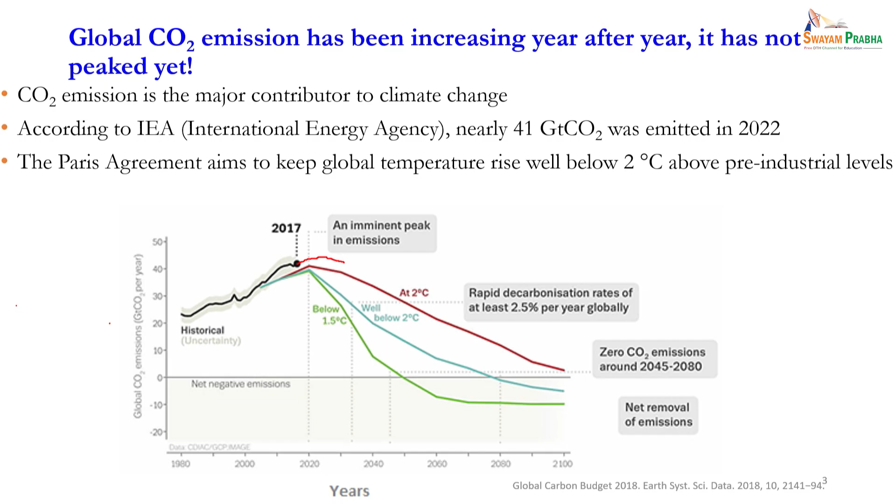If you look into this, if you have to go below 2 degrees or below 1.5 degrees, or if you are supposed to be at 2 degrees, these are the significant CO2 emission cuts needed. We will talk about it later, but let's go back to this slide again.

So what we see here is that in the 5 or 6 year duration we have to emit another 250 billion tons of CO2 into the atmosphere, which basically means this is the bus we have already missed. We will not be able to keep the global temperature below 1.5 degrees of the pre-industrial time. So if the pre-industrial average temperature was say 25 degrees, it is assumed that it will become an average of 26.5 degrees in another 4, 5, 6 years.

So if we had really wanted to keep it below 1.5 degrees, most of the technologies which we have already developed must have been implemented right now. It is not working at this pace. So this is gone. Let us now look into the 2 degrees scenario.

For the 2 degrees scenario, that is, to avoid a 2 degree rise compared to pre-industrial temperature, the carbon dioxide budget which we have is roughly 1150 billion tons. Now, this does not mean that this is an exact number. It tells you that if you emit more than 1150 billion tons of CO2 into the atmosphere, there is a 50% chance that global warming will be beyond 2 degrees of what it was in pre-industrial time. So let us assume a 50% chance is what we are now talking about.

Here also we gave that same number. So, 1150 billion tons of CO2 is what you can maximum emit. And this basically brings to this point, very important point, this is your lifetime target. It's not a target for 2050 or 2070 or 2100.

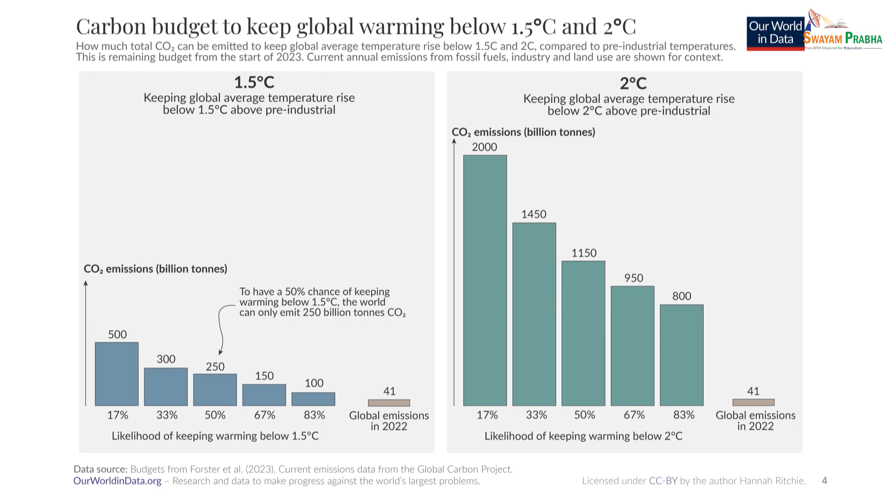You will have to break down all those sectors from where there is a CO2 emission. Okay, power sector is the biggest culprit. Most of our electricity comes from burning fossil fuel, either coal or other forms of fossil fuel, oil, gas, whatever you talk about. So if you are burning coal, this is the worst, because coal is mostly made up of carbon.

So you are burning coal to produce electricity, that's the product, but there is another product in this process, that is the carbon dioxide. Okay, C plus O2 will give us CO2. CO2 is a product. Energy is actually a byproduct which we use. Actual product is CO2. Now what is the challenge? We are saying that we will run a process where we will capture the product and put it back. Now this is a big challenge, big task. So far in human history we have not done anything like that.

People typically compare such things with pollution control and all those things. Pollutants are typically byproducts. They are at ppm level. SOx, NOx, carbon monoxide, particulate matter, all of these which we have somehow handled either from the tailpipe of vehicles or from point sources, we have only handled the byproducts which are not even 1%.

Today what we are talking about, we are saying that we will capture the product itself, and it's not pure when it is available to you. It comes as a 10% mixture with the remaining 80 to 90% of nitrogen. This makes it even more difficult. So this is the challenge, and this is why it's a very tricky situation, what you will do so that you will become net zero.

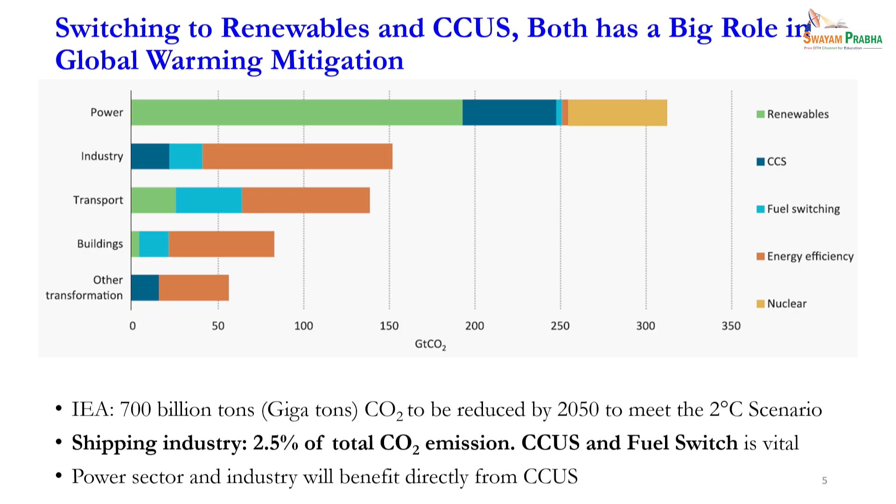Let's move on. The take home message of these two slides is: 1.5 degrees is gone. 2 degrees is what we are targeting now. If you have to target 2 degrees, the two options we see in this slide are, one, move from fossil fuel based energy sources to green energy sources. That is going to reduce your CO2 footprint. And whatever CO2 you are producing because of materials, electricity and all those things, you will have to capture that CO2, utilize it or sequester it.

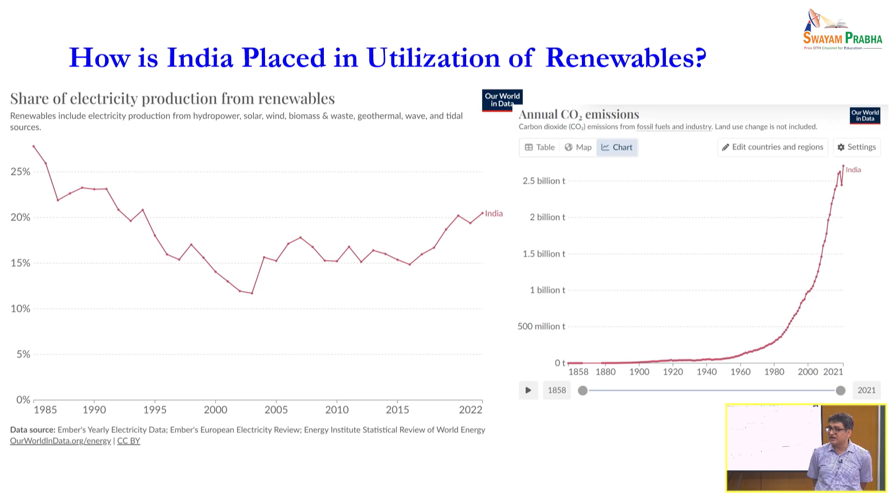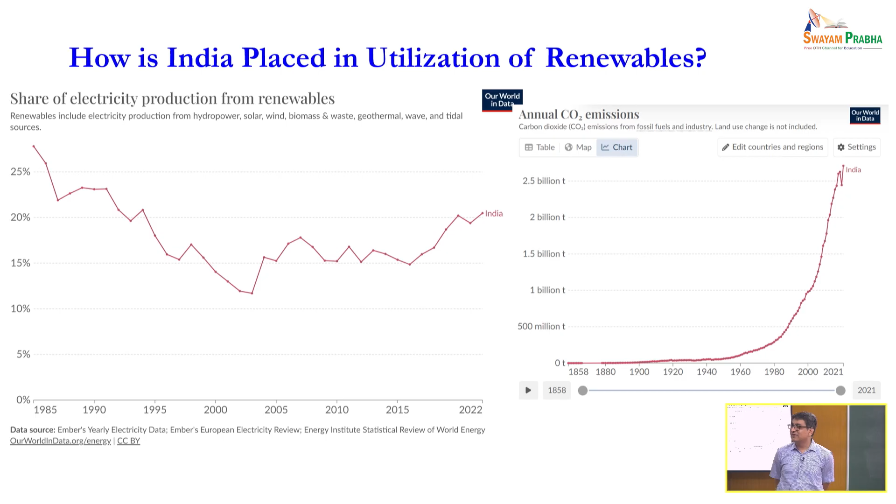Other countries will say, even today, in Azerbaijan, at this last COP, they started saying, no, China and India, we should not consider them as developing countries, we should consider them as developed countries. As soon as they count you as a developed country, you will have 100% onus on reducing your CO2 emission. Right now, there are a lot of funds which you can utilize from the World Bank and other sources. So those challenges are there, let us not talk about that.

Moving on. So this is the story of green energy. I do not want to talk too much, but there are other challenges here, whether these are net zero processes or not, and if it is really a net zero process, for how long is what we also have to understand. So this is the installation of solar. We are increasing nicely, we have not reached our target, but that is not a problem. The problem starts later. When we talk about solar energy, it has a plant load factor of roughly 20%. What exactly is plant load factor? Those people who are in industry would understand it better than the students.

Plant load factor means that if I have installed capacity of 100 megawatt, how much I am actually producing from it. For example, in solar energy, sunshine is only 6 hours a day maximum on average. We have to average over the entire year. Summer time will have more sunshine; monsoon time, like in Chennai, from the last 2-3 days we have not seen sun. Winter time in northern India will see no sun for many days. So on average you have sunshine for 6 hours a day.

It basically means you will have to install 5 times what you actually need. It basically means that the plant load factor is 20%. If I install 5 times, only then will I have enough during the 6 hours of sunshine to utilize that electricity for the remaining 18 hours when I do not see sunshine. So this is why the plant load factor of solar energy is very poor.

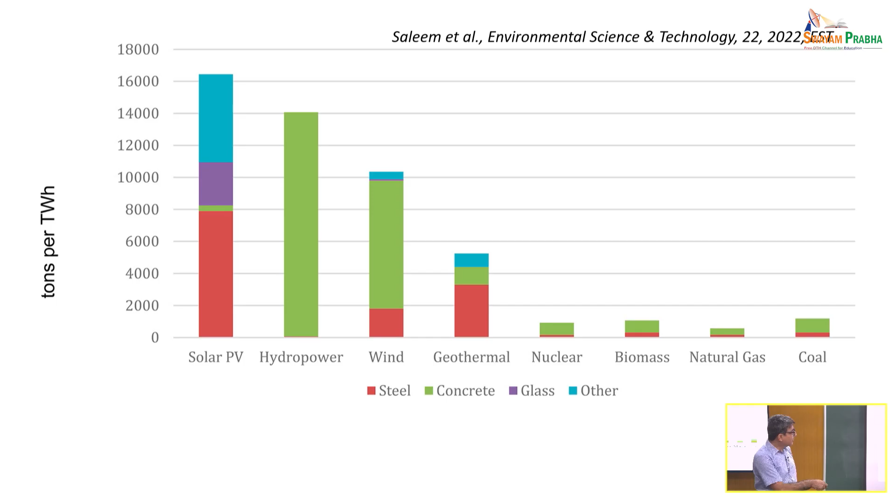So the point I am trying to make, if you start looking into how much CO2 you have already emitted. These processes will emit CO2 while you are producing the electricity. This process will emit CO2 while you have put the plant itself. So there is CO2 emission in the capital expenditure of this process, and this is during the operation of this particular process. Now let's look a little deeper.

Typically, when you are producing 1 kilogram of a material in a single step or dual step process, you would roughly produce 3 kilograms of CO2 if you are using fossil fuel. For example, on average, 1 kg of steel will produce roughly 2.5 kilograms of CO2. Similarly, any other material will have a CO2 footprint. If I am going to produce 16,000 tons of this material to produce 1 terawatt hour of electricity, I am already producing 48-50,000 tons of CO2.

Now you have to understand that we are doing 5 times the required installation, because even though I need only X kilowatt hours of electricity, I will have to install 5 times that because only a 20% plant load factor is there. So that 50,000 of CO2 footprint, 5 times that becomes 250,000 of CO2 footprint. So while these processes do not produce any CO2 while producing the electricity, they have a CO2 footprint which has to be divided over the lifespan of the solar panel.

Now if the lifespan of a solar panel is 20-25 years, a very good thing, because typically the numbers say that in roughly 5 years you should get payback for the CO2 produced during the installation phase. So if I am going to produce electricity for 20 years from a solar panel, that makes sense. The first 5 years will balance out the CO2 footprint, but the remaining 15 years we will gain. But then look at the other point I was trying to discuss. In 2018 people predicted that by 2020 we will peak.

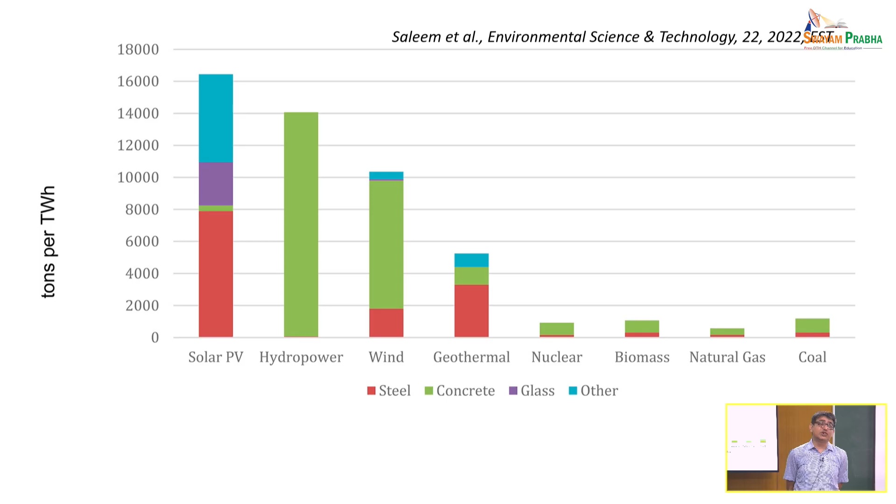Why have they not peaked? Because we are continuously installing new solar panels, new wind energy, all kinds of things, even though we have sufficient capacity from fossil fuel. Now when these new installations are coming, as per this discussion, these new installations are actually adding CO2 into the atmosphere, not reducing it. So if these installations are not running for 5-10 years, it is not going to bring it down.

So this is why you are not able to predict this peak, because you are not taking into account that the new installation which has to happen has already emitted the CO2 for the next 10 years. Otherwise, over these 10 years, the fossil fuel base would have slowly emitted those numbers. This you have already emitted at once. So the more green you do right now, the more CO2 will come into the atmosphere for the short period of time. The challenge will start with technology advancement.

5 years down the line, a faculty will tell you, no, I have a solar panel which is 25% efficient. Today you are running a solar panel which is only 15% efficient. Change your solar panel. So 5 years down the line, you will be forced to change your solar panels. When you are changing your solar panels, what will happen to the CO2 footprint? Will we become net zero? We will not. This is the challenge.

And this is bound to happen, because in 5, 6, 7, 10 years' time, you will see that the efficiency of the solar panel, even the technologies, will be changing. You will need new, more efficient technology. So you will again have to do the same thing. So we cannot jump there and say we will become net zero by so much time. It is a step change. It takes time to do all this. It does not happen automatically.

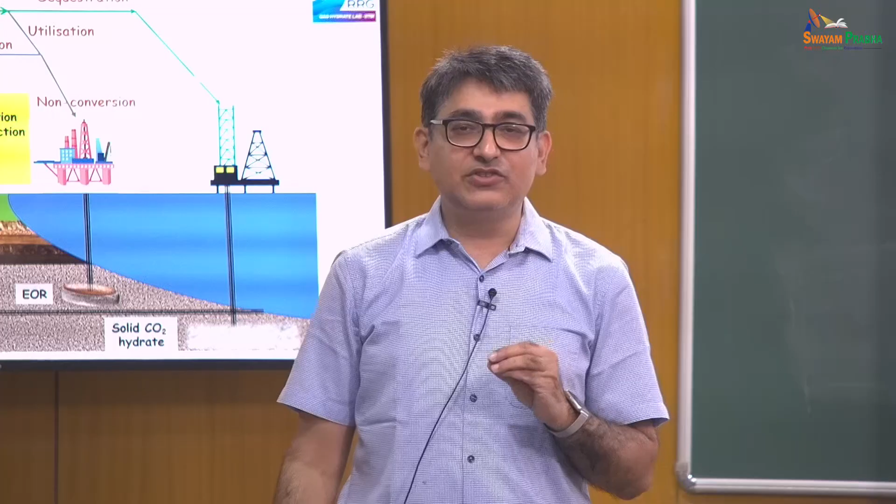So this was the story of green energy. The take-home message is, don't assume that green energy is 100% net zero today. It's not. I gave an example of solar panels, but if you talk about turbines, for the blades, you don't know how much material has gone into those blades, and they are not simple blades. They are designed materials, which basically means these materials have gone through 5 different steps. Carbon fiber goes into it.

Where do you get the carbon fiber? Does it grow on trees? No. This carbon fiber has gone through multiple steps, high temperature processes, and has emitted a huge amount of CO2 which we are not counting today. So each of these materials are the solutions which will make us net zero. I am not saying they are not going to make us net zero. They will, but it will take some time. Right now you are emitting all the CO2. So this is why this peak prediction is very difficult for us to do.

So that green energy thing is done. Let's now look at CCUS, because this is another area and one focus of this particular class.

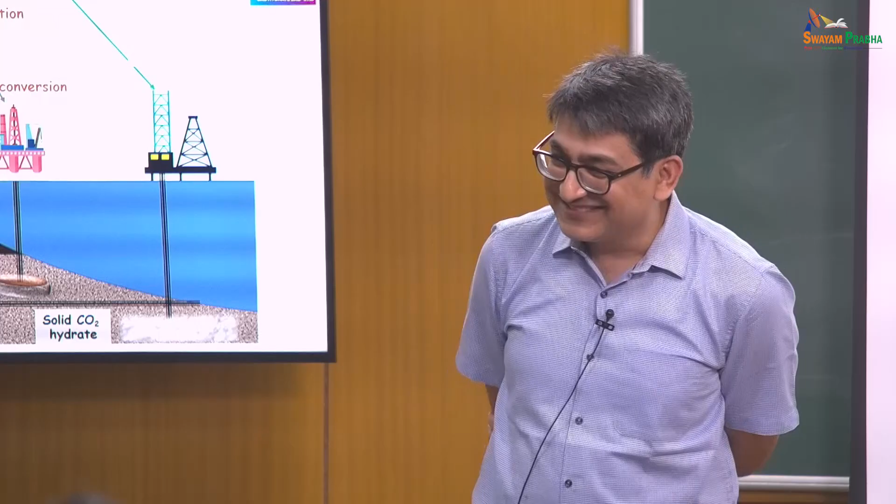How much time do I have? Okay, no, I have enough time, don't worry.

I will talk about the problems first; solutions we will talk about slowly. Solutions are difficult to come by, the problem is easier to explain. So carbon dioxide capture, utilization and sequestration, CCUS, is actually a 3-step process. First you have to capture the carbon dioxide. Most of you are chemical engineers; it's basically a separation process. We are separating carbon dioxide from other gases. What are these other gases?

The other gases which come out during the combustion of coal. Why do we have to worry about it? Because coal is a solid, and you have to burn the coal with a gas. The other reactant is a gas. So when I have to react a solid with a gas, there is a problem. As a chemical engineering problem, it is a bigger problem, because a solid has millions of molecules in this much space and a gas has few molecules in this much space.

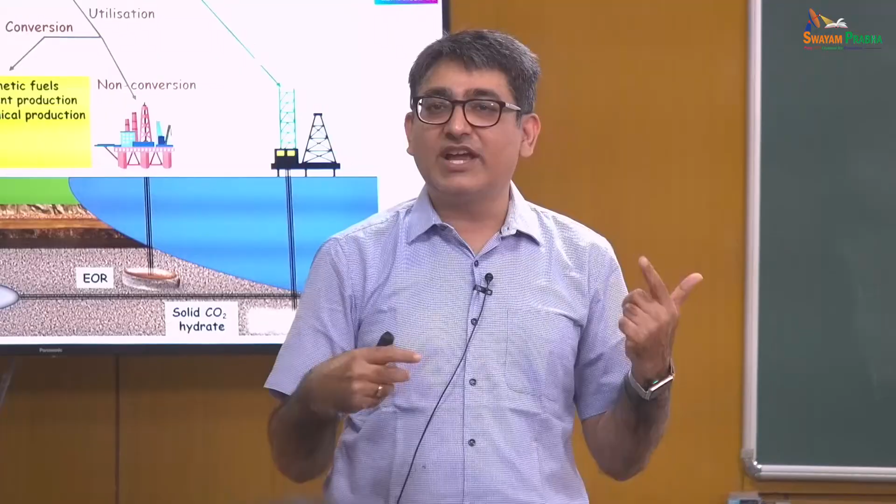And if these two have to react together, the reaction has to happen 1:1. So if I have to make this true, that is, the reaction has to happen 1:1, I have to compress the gas, okay, and I will have to pulverize the coal. Both I will have to do. So this is why the combustion typically happens with excess supply of air.

Okay, if it does not happen with excess supply of air, then instead of carbon dioxide you will produce carbon monoxide. You don't want that, because it will be a poisonous gas. CO2 at least is not a poisonous gas. It's loved by the plants.

So you might die, but plants will survive. The human civilization will evolve again, which has happened multiple times. So it should not be a problem.

You don't want carbon monoxide to come out from this process. So this is why it's typically done at a very high pressure or excess supply of air. Now why air? We could have done it with oxygen. No, it will produce only CO2 and a little bit of additional oxygen. Would have been better? Maybe it would have been better, but then when these power plants were designed some 40-50 years back, they said, oh, there is only 20% oxygen in the air.

If you have to separate oxygen from the air, it will be very expensive. Why do that? Let's burn it from the air itself. Okay. So 40 years back, we were worried about separating 20% oxygen from the air for combustion of coal. Today, we are ready to capture 400 ppm carbon dioxide from the atmosphere. So this is the story. What can you say? Okay. So this is the challenge. Air is what is now being used.

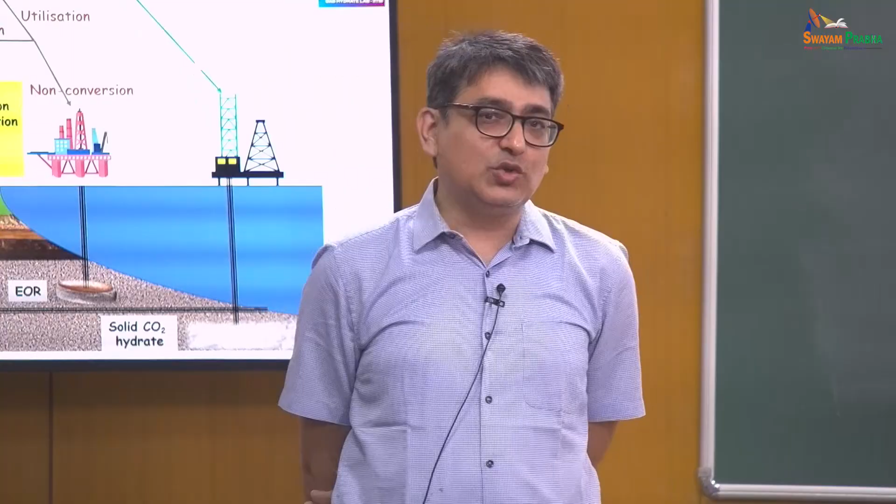So when you are using air, it has roughly 80% nitrogen, only 20% oxygen, and on top of that you will have to have excess of air. So 80% becomes 85%, 90%. So by the time the combustion happens, you will see that there is only 10% carbon dioxide, 12% carbon dioxide, and the remaining being nitrogen. So the CO2 capture process is basically a separation process, a classical chemical engineering process of separating two molecules. Minimum two molecules will be there. One is CO2 and one is nitrogen.

But in reality, you know, there are many molecules. CO2 is there, nitrogen is there, SOx is there, NOx is there, oxygen is there, all kind of crap is there which will actually kill you. But let's not worry about that. Right now, let's try to make it very simple. We have two molecules, carbon dioxide and nitrogen. Now the challenge is, there is a proverb, no? If there is a rotten apple in a basket, every other apple gets rotten.

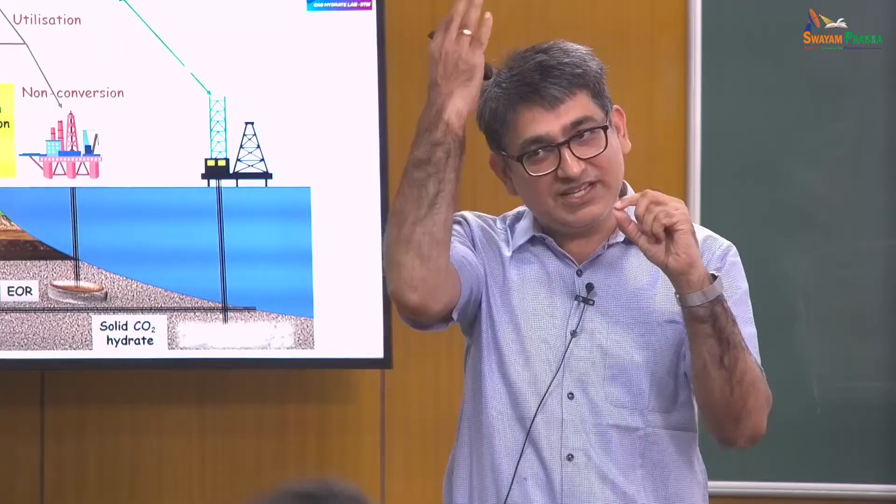So when there is one CO2 molecule in the vicinity of 9 nitrogen molecules, this CO2 molecule will start behaving like a nitrogen molecule. You know why? Because the nitrogen molecule at room temperature has very high thermal energy. It's a small molecule. If you give a little bit of energy to it, it will jump like anything. Okay? If you are very light, you can jump. If you are heavy, you will not be able to jump.

So it's a very small molecule. So at room temperature, it has a very high kinetic energy. And with that kinetic energy, it goes and bombards the CO2 molecule. So CO2 molecules also start jumping like nitrogen molecules. So now, what I was trying to do, I was trying to capture a CO2 molecule from this mixture. So if I have to capture someone and this guy is running, we need more people to capture it. This is the challenge.

So when we talk about capturing CO2 from a flue gas, a point source, there are roughly 9 nitrogen molecules to one CO2 molecule. Now if I have to capture one person among 9 other people, it's not that difficult. Okay, I should be able to employ 5 people and they will run and they will catch that particular guy. But now the second problem is, what if we have to capture one among 2500?

What is that problem? That is direct air capture. Okay, this is the elephant in the room. People say direct air capture is the future, because we have already produced all the carbon which we wanted to produce from under the ground. Now there is plenty of carbon above the ground. Why unnecessarily dig under the ground for carbon?

Let's capture all the carbon from above the ground. We will convert it into chemicals by adding hydrogen. This is what CO2 utilization is. This is what has been talked about. The US is pumping billions of dollars. They give $180 as subsidy if you are capturing 1 ton of carbon dioxide directly from air. Okay, but look at the thermodynamics.

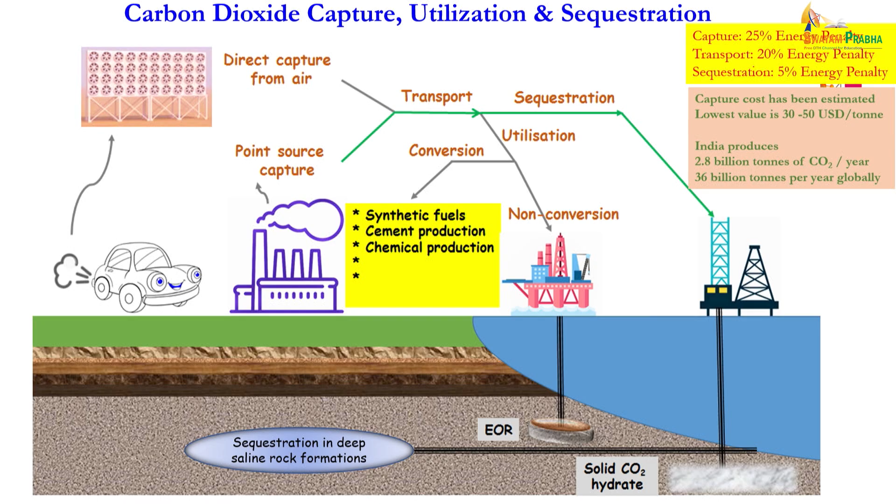The cost here, for example, the direct point source capture is roughly $30 to $50 per ton, or in terms of Indian rupees, roughly 4 to 5 rupees per kg. You have some representatives from Technip, they may claim that they have a 3.5 rupees process, but I will tell you it's roughly 3.5, 4, 4.5, not less than that per kg. It comes out to be roughly $30 to $50 per ton from point source, and I am not even talking about many other processes which we will see later.

If I am going to capture this from here, the subsidy given is $185. So you can imagine what the actual cost will be. Now if, in India, I have to capture 1 billion tons, multiply it by $50, how much money will get consumed?

But at the end of the day, I am trying to say that all this is possible if we are aware of what we have to achieve. We should be able to achieve it if we know what we have to design it for. The designing has to be done for net zero, nothing else. If we are not designing it for net zero, it will not become net zero. All this I have already discussed, I will quickly move on.

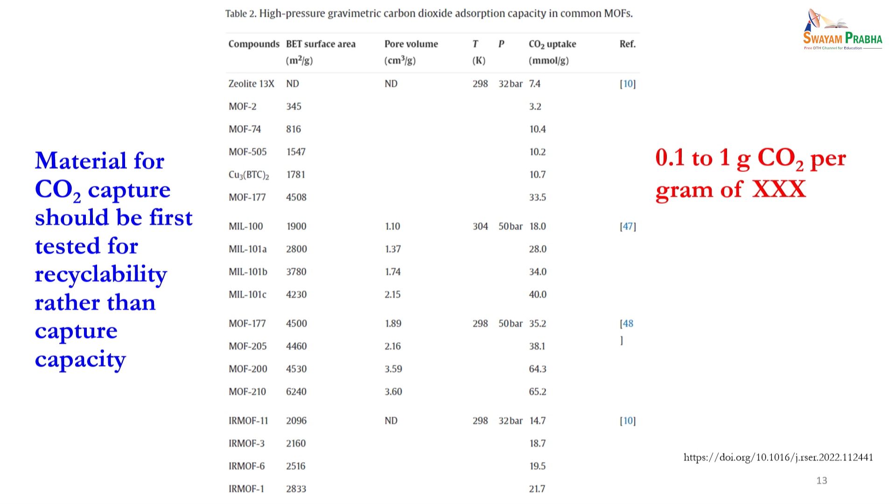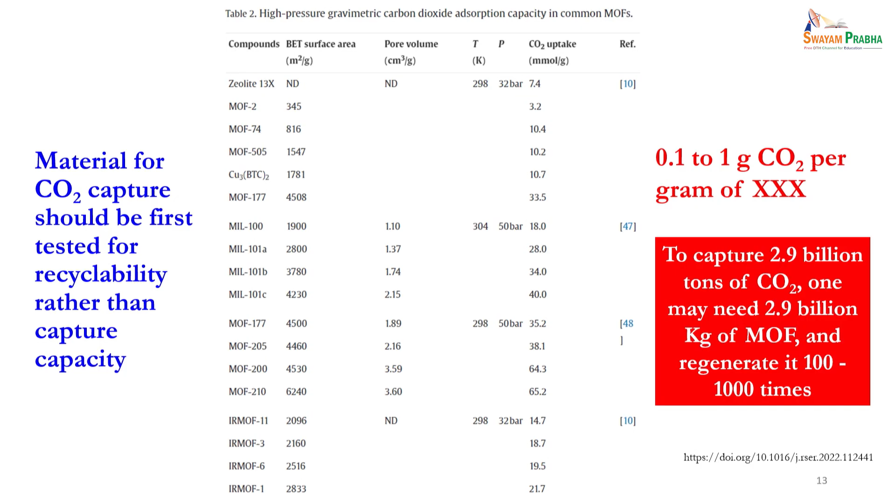This is the material. For example, you will have some zeolite, some metal organic framework. Typical number is 0.1 to 1 gram of CO2 per gram of sorbent. So if I have to capture 2.9 billion tons of CO2, I need 2.9 billion kilograms of MOF, regenerated 100 to 1000 times. You don't even know how to generate an MOF, for example, or any other exotic material. In labs, it takes 1 day, 2 days to produce 1 gram.

I am not talking about the time here. I am talking about if you are running it for 1 or 2 days using the same energy which comes from fossil fuel. Look at the CO2 footprint of this material. This material has not 3 kilograms of CO2 footprint, it has 10 kilograms of CO2 footprint. And this is the same story for all those carbon fiber reinforced wind turbines and all those things. These challenges are there.

Industry says that we have monoethanolamine, diethanolamine and all those things, and the solution Technip might tell you is an amine based solution. We also talk about it, we also do similar research. But let's look at the challenge over here. This is supposed to be the God molecule, which will capture all our CO2 and get rid of all our problems. But where does this molecule come from? Does it come from air? It does not. We will have to produce this molecule.

How will we produce this molecule? We have to produce it by reacting ammonia and ethylene oxide. The ammonia which currently produces monoethanolamine, is it green ammonia? Not green ammonia. It's grey ammonia, black ammonia, and you know the ammonia process is 300 bar, 300 degrees centigrade. Can it be done without CO2 emission?

So first this monoethanolamine has to capture the CO2 coming out from the ammonia processing, and then from the ethylene oxide processing, and then if it is still around, it will capture the CO2 from here. That means if it gets consumed in doing this, then this CO2 will remain as it is. So this is a challenge.

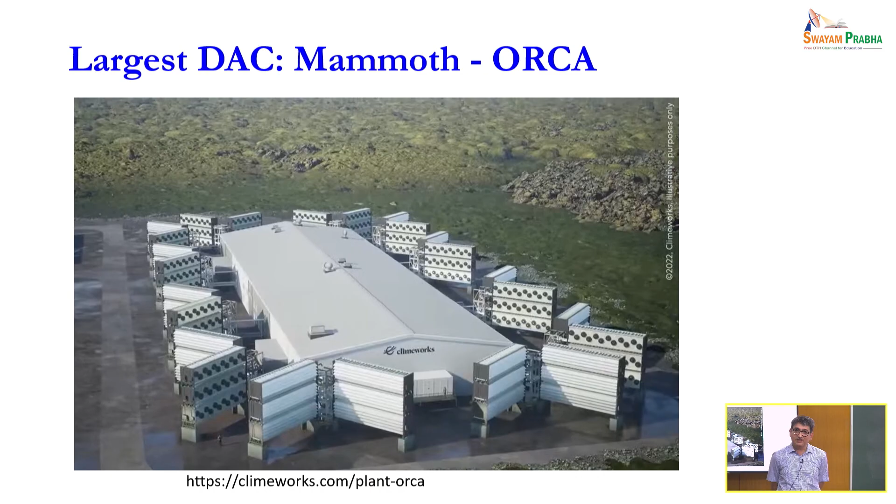This is the largest direct air capture plant, which is called Orca, in Iceland. Beautiful plant, excellent technology. Okay, how much does it capture? It captures 4,000 tons of CO2 every year. Tell me how many tons of cement and steel have gone into production of this plant. This plant has already emitted 10 years of the CO2 it can capture, maybe more.

Is it net zero? Maybe if it runs for 50 years. But do you think it will run for 50 years? The technologies which are being used, Gen 1, Gen 0 technology, what we will call it, do you think it will be running for 50 years? I doubt. Maybe we can change the material, the construction will be there, but if it's corrosive material, will it?

I'll tell you, oil and gas, many of you are from there, these amine based processes which are actually being utilized to capture CO2 from natural gas, hardly 5-6 years is the lifetime, they change it. They make a lot of money, so they change it, they don't bother. Here you don't make a lot of money, these are all money consumers, so you will not be able to. So these are the challenges.

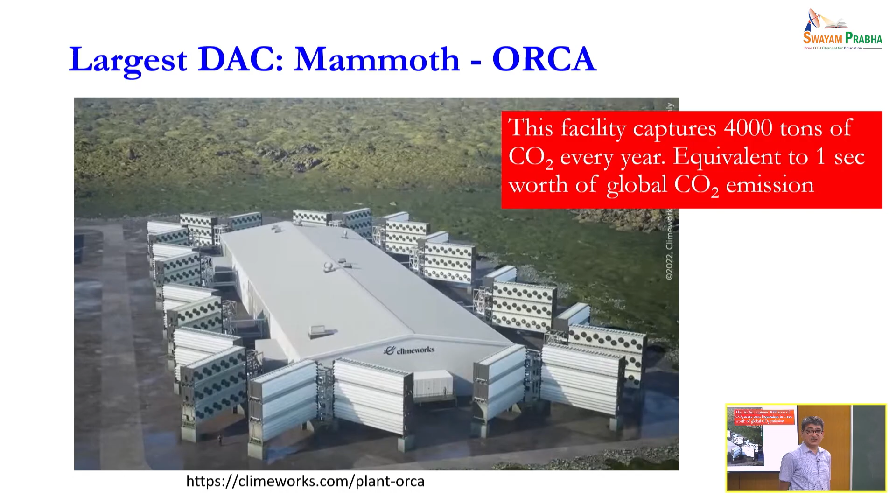Okay. Forget about the remaining slides. So we do all that in our group over here, so I don't want to do marketing in this particular class. Let's move on.

So when we talk about CO2 capture, we know now that we have to generate a material to capture CO2. What if we don't generate a material to capture CO2? Because if you are generating a material, if you want to generate 1 kg of MOF, you will produce 10 kilograms of CO2. Your net zero becomes not a possible solution. But if I don't generate a material, I take a material which already exists, then I don't emit those 10 molecules of CO2 for that 1 kilogram of material, or 1 molecule of material, which I have just used.

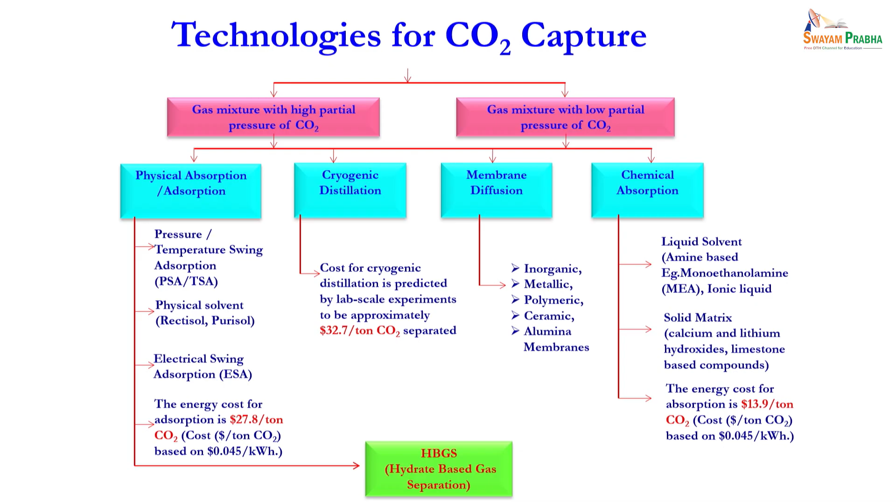So there are different solutions, different compositions of CO2, oxygen, nitrogen, hydrogen, H2O, CH4. I don't want to go into each of these. So depending upon the concentration of CO2, you have different solutions. One of the best ways of capturing CO2 is not going for a chemical route, but going for a physical route. What is a physical route and what is a chemical route? Chemical route basically means that the CO2 is going to chemically react with the material in which it has to be captured.

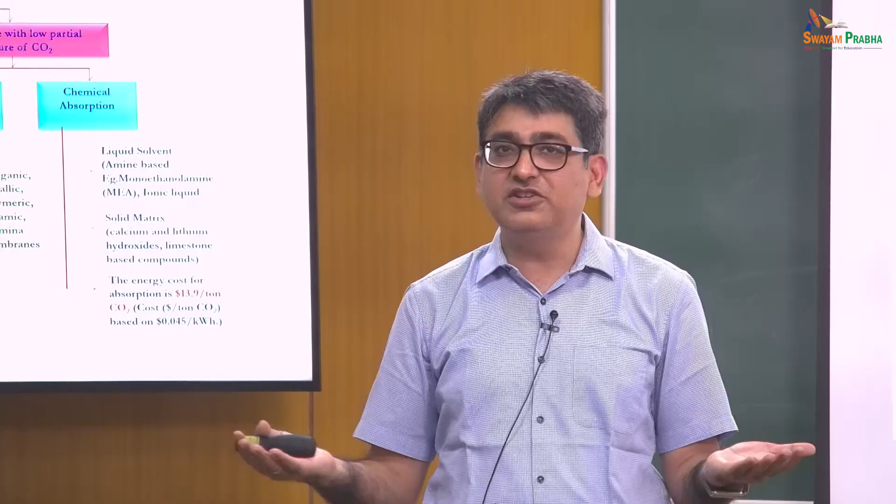So if I have a mixture of CO2 and nitrogen, I have two options. I expose this gas mixture to a material which chemically reacts with CO2. So this is called the chemical route. Why do we need this material? We need this material because the binding chemical energy is much stronger. So even if my concentration of CO2 is low in my feed gas, if I am using a chemical, it will be able to react really fast.

Why is fast important? Because we are talking about tons and tons of this material. You need kinetics which are really fast. Otherwise your CO2 molecule will run away, you will not be able to capture it. So you need a material which has very fast kinetics. And which material will have very fast kinetics? If it is thermodynamically very feasible at that temperature and pressure condition, a chemical reactant will be able to achieve this much more easily compared to a physical adsorbent, which separates by dissolving or adsorbing CO2 in a larger quantity compared to nitrogen.

So when we talk about a physical approach, it's not molecular recognition; it's there to a certain extent, but it's not 100% molecular recognition. When we talk about chemicals, it recognizes the molecule and captures it. It will not capture even a single nitrogen molecule, because that recognition ability in a chemical is much better compared to a physical material. A physical material will capture based on van der Waals interaction, and van der Waals interaction will be there in every molecule, whether it is a small molecule like nitrogen or a large molecule like CO2.

Both of them will have van der Waals interaction. CO2 will have higher van der Waals interaction, so it will be able to capture faster compared to nitrogen, which is slightly slower. So in this process, physical process is more about enrichment. It's not about complete separation. Typically if you are looking for 100% separation, you will have to go for chemical approach.

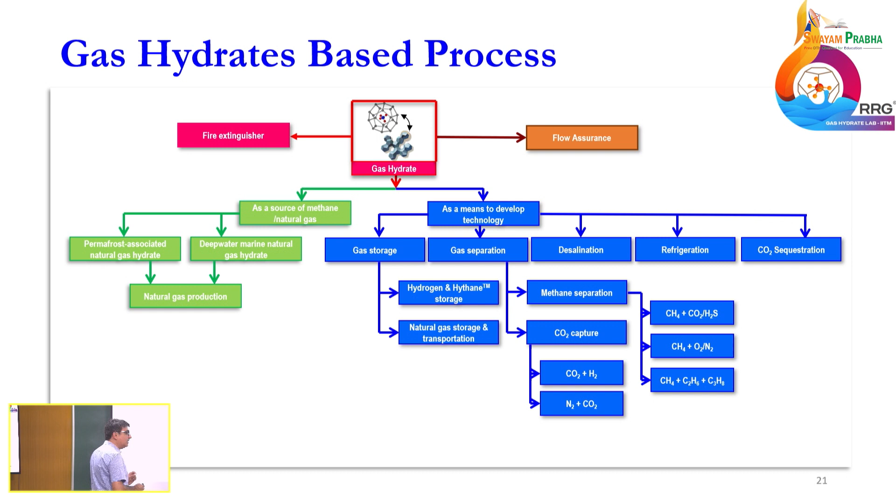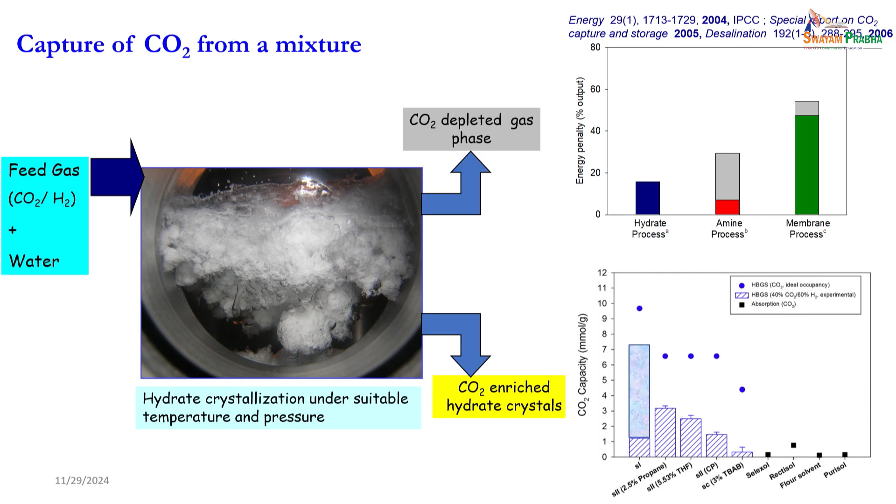Gas hydrate is one such process where you do not need to generate a new material. I am using water, not fresh water. I can use sewage water, effluent water, sea water, any water, it does not matter. I will be able to bring this water and this gas mixture together, and this would convert into this kind of hydrate. Once this converts into hydrate, I have achieved 2-3 things. Where the advantage comes from this process, I will tell you. 3 things I have achieved.

One, I have purified the water, because once hydrate forms, it will only form with the pure water molecules. So all the water molecules will come together and form these ice-like crystals. So if I separate out this crystal and dissociate it, I have got pure water. That's one thing I have done there.

The second thing I have done: when I have a huge amount of solar energy available for the 6-hour period, I can form a huge amount of hydrate during those 6 hours. What have I done? I have stored all that energy in the form of the enthalpy of hydrate formation. Because when I have no sunshine and I dissociate this hydrate, it's an endothermic process. So my temperature will keep going down, so I will be able to do my cooling and all the things which require 60% of the energy of a building.

So first, I separated pure water from contaminated water. Second, I have stored a huge amount of solar energy, which I would otherwise need batteries or something else to store, so I have stored it already in the form of hydrate. And the third is the separation of gas, which was our main goal.

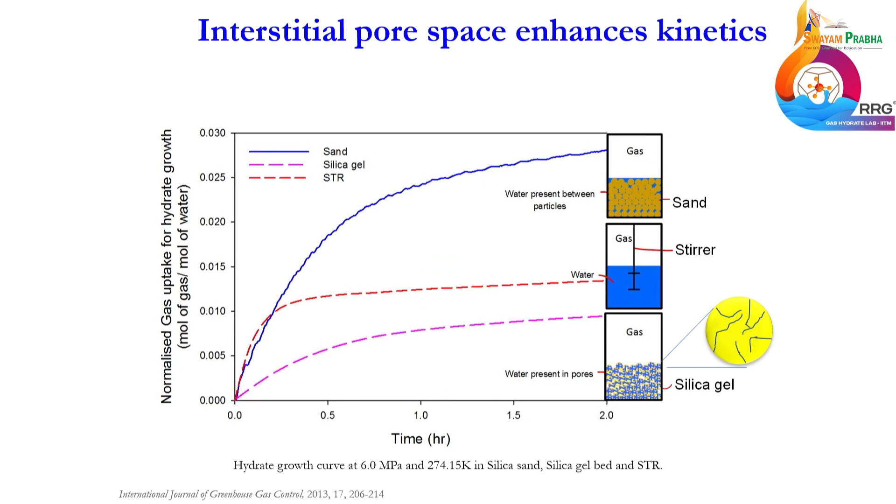Okay, so that's all from me today. We will not talk too much about all of these. There are a lot of fundamentals on hydrates. Do you have time? Should we go for another 5 minutes, Jitendra, if you allow?

So if I have a mixture of carbon dioxide and nitrogen, and it forms a structure 1 hydrate, the CO2 will easily go into the large cage, as well as nitrogen. But nitrogen is a small molecule and the cage is large, so it's free movement for nitrogen. I'd have to really pressurize it for it to remain in that cage. If I am not going to high pressure, the nitrogen will go in and come out. It will not really get stored in there.

The same cannot be said for CO2. At a moderate pressure, CO2 will go into the cage and sit in there, because the size is bigger. It will, because of the pressure. See, the chemical potential difference is there. There are 2 ways we can understand it. If I have a cage which is empty, and all the CO2 is outside, what does the chemical potential difference tell you?

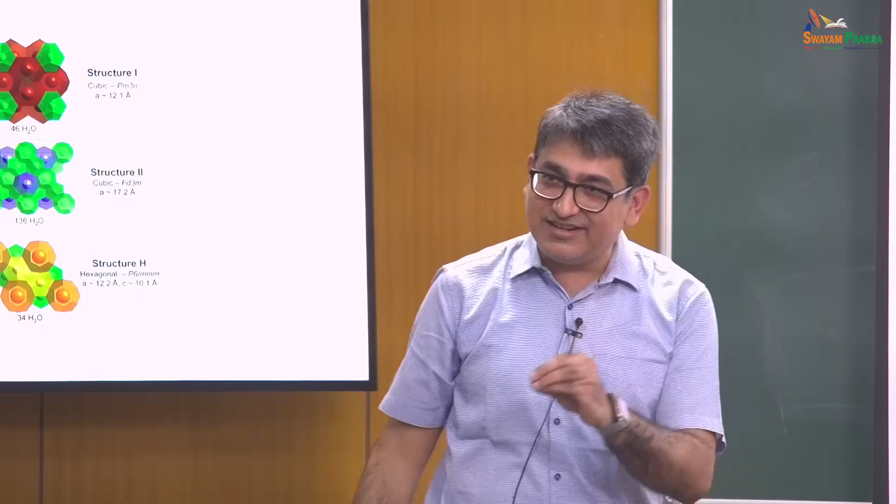So now those who are not in hydrate, they will find all this boring, but those who are in hydrates, we can have a separate discussion on some of these things.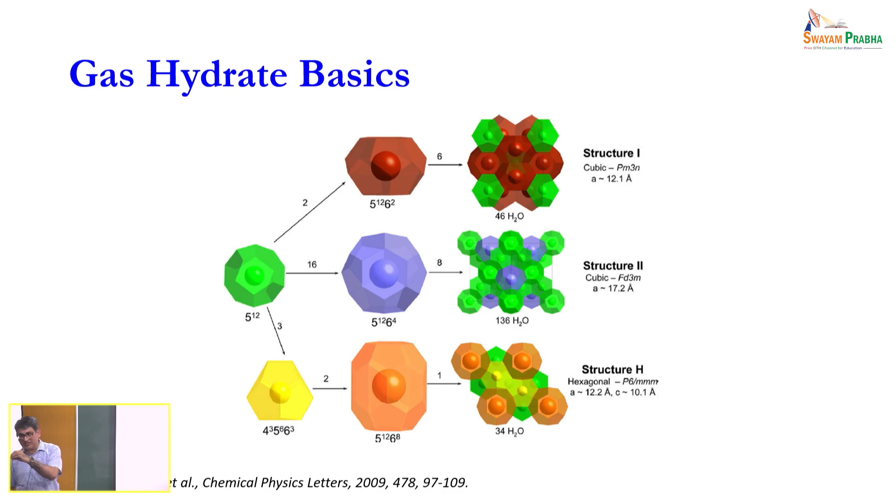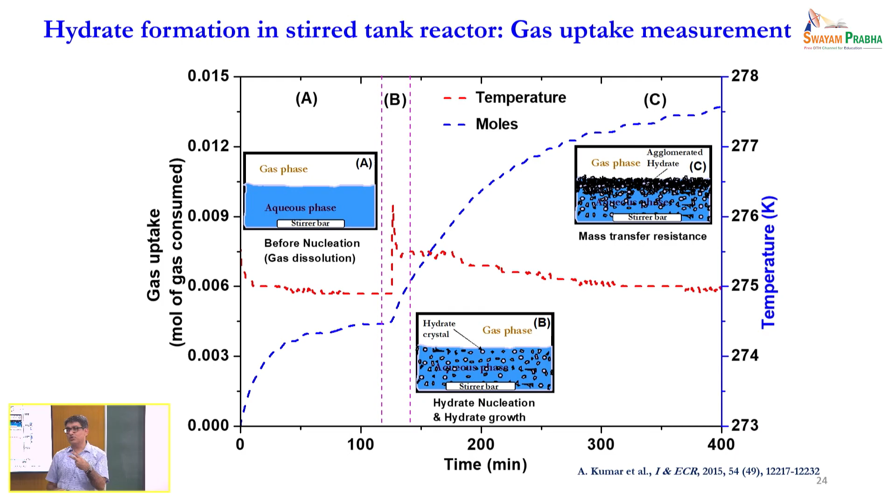Okay. Similarly, we can separate between CO2 and methane and all, what exactly is required. All those things have to be thought step by step. Then everything can be designed. So the other thing which we typically design in a hydrate process, two things we design. One is a classical chemical engineering process where there is a multi-phase, multi-component system. When you talk about a multi-phase, multi-component system, then mass transfer and heat transfer become a big challenge. Why mass transfer? Because a gas has to diffuse through the liquid.

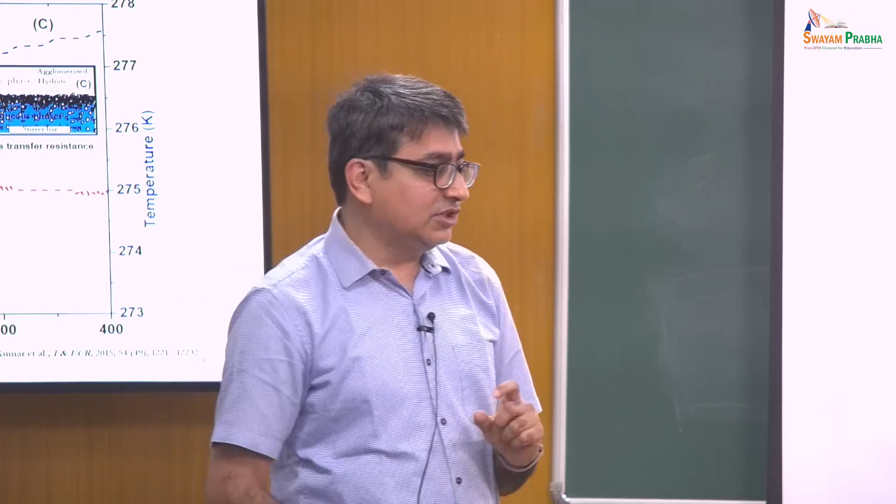Now there is another piece of information which I will give you, and I will try to stop in another couple of minutes. Water, being 18 molecular weight, should not be in liquid phase. It's in liquid phase because of the hydrogen bonding. So if I have to enhance the diffusion of gas in liquid water, one best option for me is to weaken the hydrogen bonding between the water molecules, so that other gases will be able to diffuse faster.

And this is what is basically being done by using some surfactant. A little bit of surfactant is added into the water, so that the hydrogen bonding strength goes down, the viscosity goes down, and it will be easier for the CO2 or other gases to diffuse into this. But the same thing will not work when you are going to use THF, because THF will dictate everything. So all those challenges are there. Moving on, too much detail.

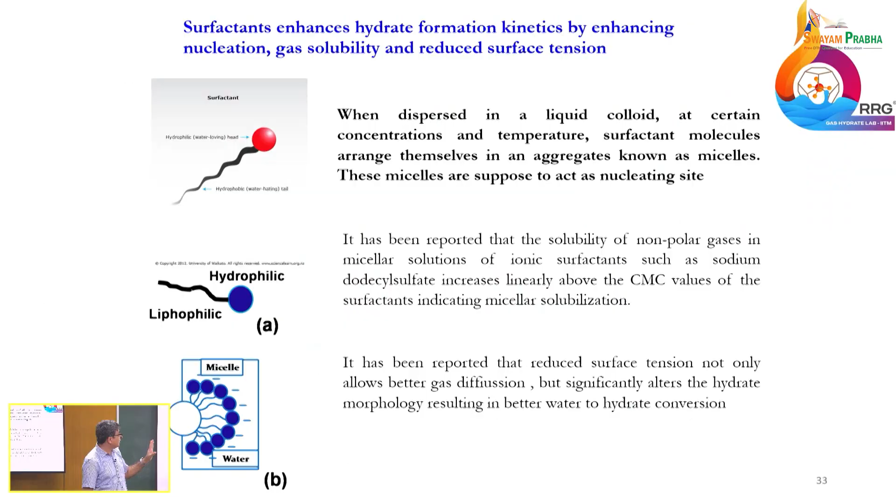So we have developed some of the processes of CO2 capture. We are trying to do a scale up of this. This only works when you have roughly 25 to 30% CO2, remaining nitrogen and hydrogen. If you have only 10% CO2, this is a very expensive process. You will not be able to achieve the same amount of output from there. That's all we have. We can talk about CO2 sequestration, but not for today maybe.

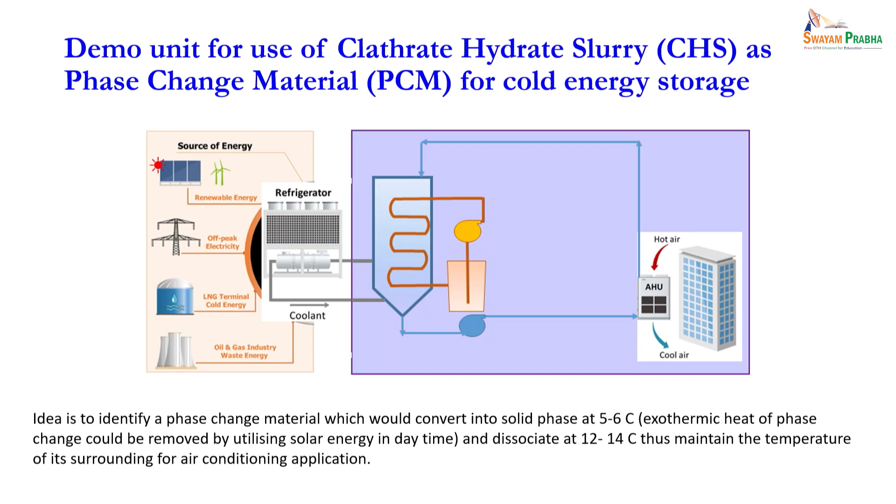So some of the other demonstration units which we have had in our lab, again no need to do any advertisement among the students. These are basically there to get money from industry, those guys.